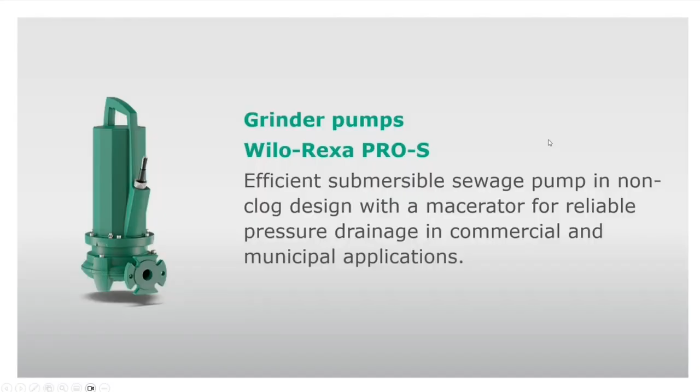First of all, the Rexa PRO-S are grinder pumps, so they are made for wastewater and especially for non-clog applications. So if you have fibers in your sewage or something like that, or heavy-duty applications, they come with a macerator to enable reliable pressure drainage, especially in commercial and also municipal applications.

If we come to the customer benefits of the Rexa PRO-S, they are excellent for anti-clogging reliability because of the new macerator they have. So it's a macerator with what we call a double shear effect. We have an outside grinder and an inside grinder at the same time in this product. We will also see pictures of that and a small video to show you how that works in particular with this double shear effect.

On the other side, we optimized the hydraulics and the macerator combination for higher delivery heads at best efficiency in the market. Additionally, the overall installation costs for that product are very low because we use on this product a 1.5-inch discharge, which is the smallest one possible. With that, we are also able to use the smallest possible piping here, so you can work with really small pipes to bring down the general installation costs of the project.

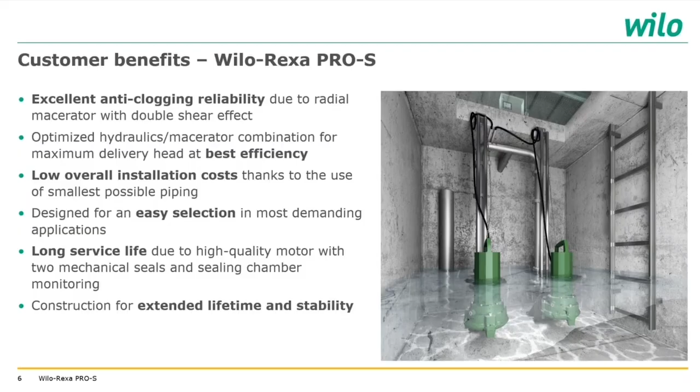If we have a look at the product in detail, first of all we wanted to highlight 6 explicit product features. As I already mentioned, the product comes with a radial macerator with a double shear effect to make it most reliable in all wastewater applications.

Secondly, it comes with a robust cast iron motor housing and FM approval as standard. All Rexa PRO-S units come with FM approval, making it the #1 choice for water management and commercial buildings. The third feature is nice to have: the Rexa PRO-S units are rated for non-immersed operation for 30 minutes.

That means you can lower the water level in the sump down to the level of the hydraulics, so you can emerge the motor even in a submersible installation, which helps minimize tank volume, gives maximum flexibility with sump size, lets you make sumps as small as possible, and provides a high switching volume.

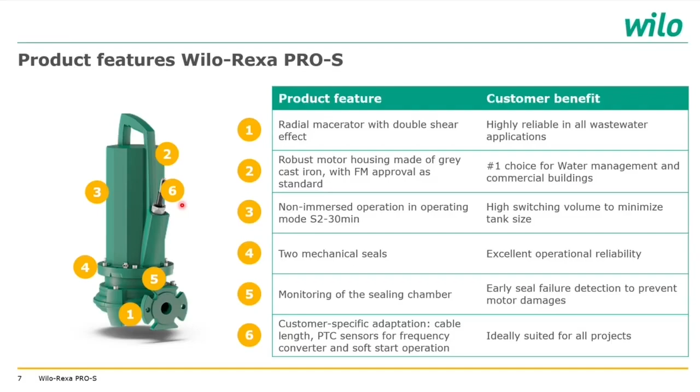If we have a look at the duty charts, we can see that we offer quite a big range of head here. We have 4 different duty curves available in the duty chart.

First, the Rexa PRO-S 0322 with 5.2 horsepower and a shutoff head of around 180 feet. Then the Rexa PRO-S 0312 with 3.4 horsepower and roughly 140 feet of shutoff head. The PRO-S 0311 with 2.3 horsepower and roughly 120 feet, and the S0302 with 1.5 horsepower and roughly 90 feet of shutoff head.

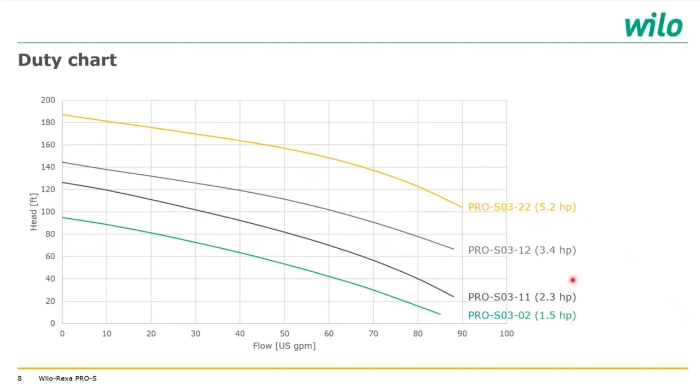If we compare that to what we offered so far, the Rexa CUT GI, we can see that we expanded the duty chart dramatically. The maximum shutoff head previously was around 140 feet, so we now get a much bigger range compared to what we had before with the Rexa CUT GI.

What's also remarkable is that we were able to downsize the motors because of the higher hydraulic efficiencies of this product compared to the GI. As you can see, the GI 0330 and 0332, which are now pretty equal to the S0302 duty curve, had to use a 2 horsepower motor, while the Rexa PRO-S only needs 1.5 horsepower to cover the same curve.

The same with the CUT GI 0343, which used a 3.4 horsepower motor, compared to the S0311 which covers pretty much the same duty curve with only 2.3 horsepower. So the 3.4 horsepower motor now delivers a lot more head than the previous option. And as I mentioned, this 5.2 horsepower curve comes totally in addition to what we had so far.

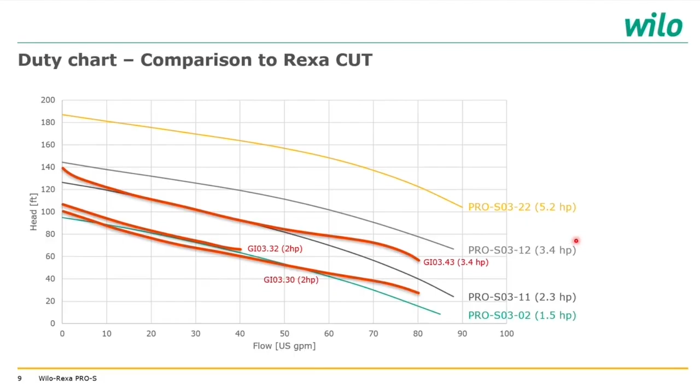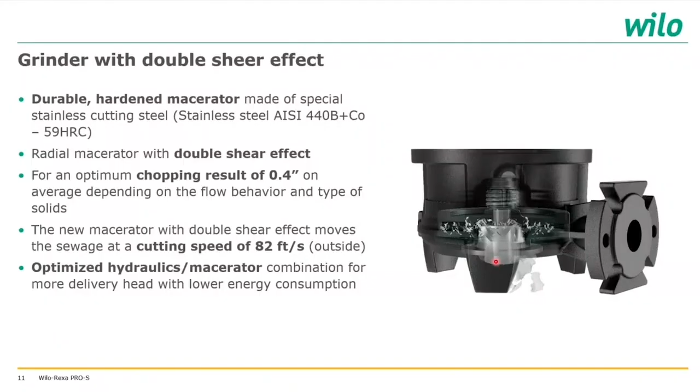This new macerator has a cutting speed of 82 feet per second on the outside, and all the hydraulics are optimized to deliver the maximum head with the lowest energy consumption.

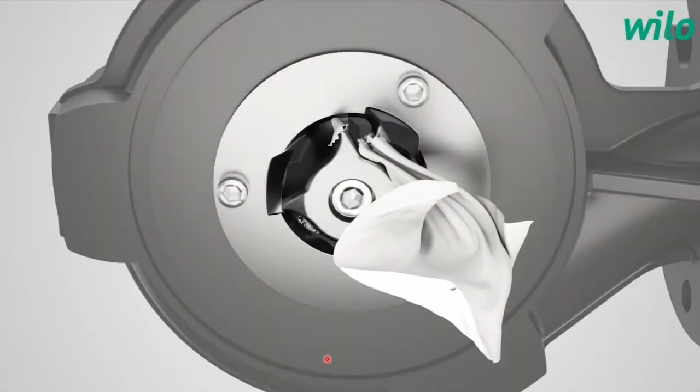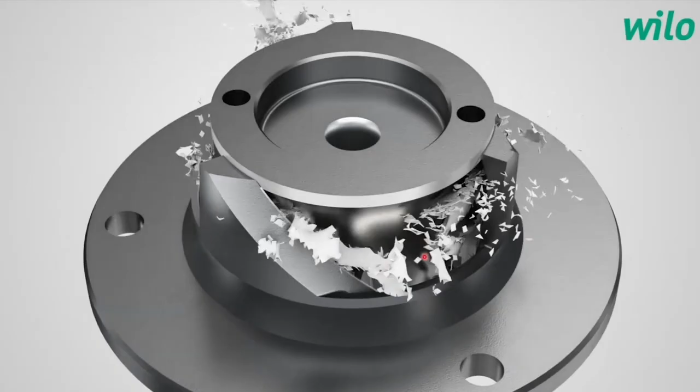Now we can have a look at a short video to see what this double shear effect is about that I was talking about. We'll see now how cloth is cut on the outside and on the inside of that macerator. First of all, you can see there is an outside blade which cuts the cloth into smaller portions first before it enters the hydraulic, and then we have an inside blade which cuts it into even smaller particles, and then from there it goes into the impeller, and from there into the hydraulic.

We can have a look at that again because it's quite short. So we have the external cut first, the outer cut, and then the internal cut, where it cuts again to make the particles even smaller before they enter the hydraulics.

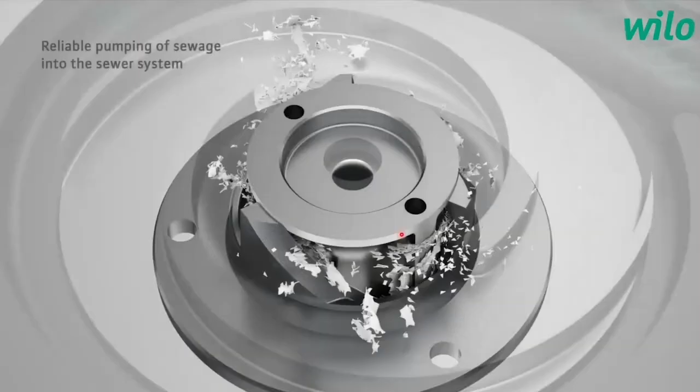Okay, now if we have a look at the technical data of the Rexa PRO-S, as I mentioned it always comes with a discharge port of 1.5 inch. It's a 125 pound ANSI flange. The weight is depending on the size of the pump, so depending if it's the 1.5 or the 5 horse motor, it's somewhere between 84 pounds and 113 pounds. The maximum delivery head, as I mentioned, is roughly 180 feet.

And we have different main supply options here. On the one hand, we have single phase options, available in 230 volts for the two lower curves with 1.5 horsepower and 2.3 horsepower. And we do have three-phase options in 230 volts and 460 volts on all of the curves - the 1.5, the 2.3, the 3.4, and the 5.2 horsepower curve.

Then we always use the gray cast iron motor housing option on the Rexa PRO-S. We'll see later on a comparison to the Rexa CUT - there we still had the stainless steel sheet metal motor housing. So this is one main differentiator here.

Then we have the continuous operation mode for immersed operations. So if it's underwater, it can work pretty much 24/7 if you'd like. If you want to emerge the motor housing, you're able to do that in operation for 30 minutes, which is usually sufficient to empty the tank, because we're just talking about from the top of the motor housing, so when it gets emerged to the bottom of the hydraulics.

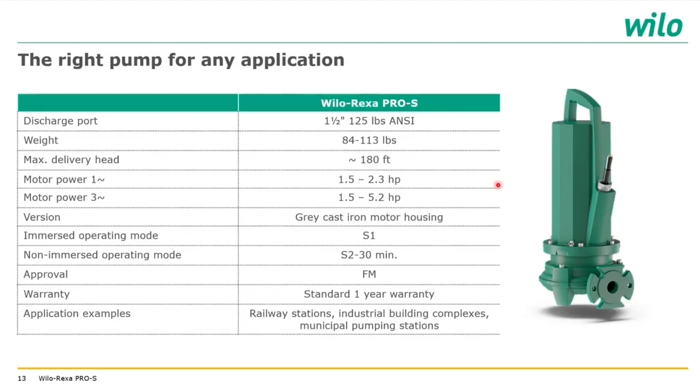If we compare it to our predecessor here, the Rexa CUT GI, I highlighted here the main differentiators. One we saw already, we get a way bigger duty chart than we had before, but there are also some other differentiators. The Rexa CUT GI was coming with a cCSAus approval for electrical safety.

Now this is one of the major changes I mentioned already. So with the CUT GI, we always had this stainless steel motor housing. This wasn't rated for hazardous applications.

Now the Rexa PRO-S comes with FM approval for hazardous applications. That's one of the main differentiators here, going from just the electrical safety certification to the hazardous area certification. Then, as we've seen on the duty curves as well, the power range expanded a lot. In the past, we had the 2 horsepower and 3.3 horsepower versions.

Now we have 1.5 horsepower up to 5.2 horsepower. What also changed is this emerged operation mode. With the Rexa CUT GI, you were able to emerge the pump for 15 minutes. Now with the Rexa PRO-S, you're able to emerge it for 30 minutes in operation.

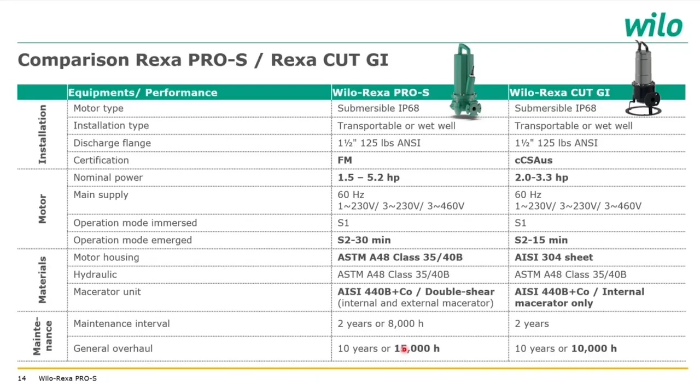Another differentiator is the maintenance. The maintenance interval for the regular visual inspection and so on is still 2 years, but the maintenance interval for the general overhaul increased from 10 years or 10,000 hours to 10 years or 15,000 hours. So the Pro-S is a more sturdy version, giving you a longer interval until the general overhaul.

If we compare it to the competition, what I've already mentioned on the first slide, we offer a pretty small discharge port here with 1.5 inch, to be able to work with the smallest possible pipings. You can always extend that to bigger piping, but you can also work with 1.5 inch pipes here compared to what the competition does with 2.5 or 3 inch discharges.

The delivery head is pretty much equal to what we see with all the major competitors. We offer around 180 feet, while the competition has 170 to 185 feet in that area, except Liberty, which offers like 250 feet, but with way bigger motors, up to 15 horsepower.

And there you can also see the big benefit of that high efficiency we have here. While others partly use vortex impellers, here we use a 2-channel impeller with the Rexa Pro-S, which brings the efficiency up a lot. So we're able to cover partly even higher delivery heads with way less power. If you compare it, for example, Myers with 170 feet of delivery head would need a 7.5 horsepower for that, while we do that with 5.2 horsepower.

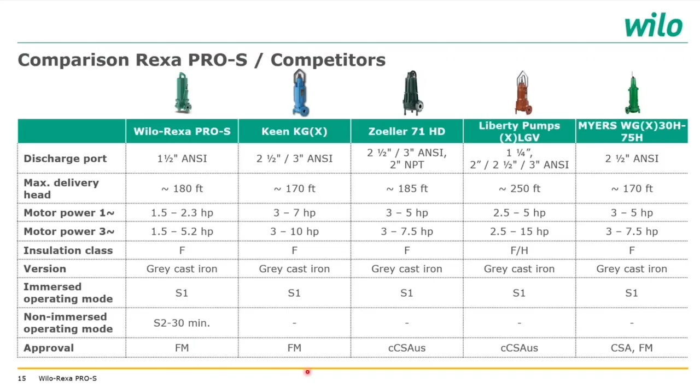Also, one reason why we changed the gray cast iron motor housing is because that's the standard in the US. All of the major competitors have that gray cast iron motor housing, and now we're equal there. The immersed operation mode is pretty much the same for everybody, that's the continuous duty. But what sets us apart is this non-immersed operating mode, where we offer 30 minutes. This is tested and certified that we're able to have this product run emerged for 30 minutes without overheating the motor or anything like that. And on the approval side, we now have the FM approval with the Rexa Pro-S, which is also pretty much the market standard for hazardous locations.

If we have a look at the stock articles we have, just as information, we will have all the different curves available on stock as of March 2026 in Cedarburg, with the lower 2 curves, the S0302 and S0311, as single-phase 230-volt options, 3-phase 230-volt options, and 3-phase 460-volt options. And the upper 2 curves, the S0312 and S0322, as 3-phase 230-volt and 3-phase 460-volt options. So the only differentiator between the article numbers here is really the voltage. There's no other changes between those 2 numbers.

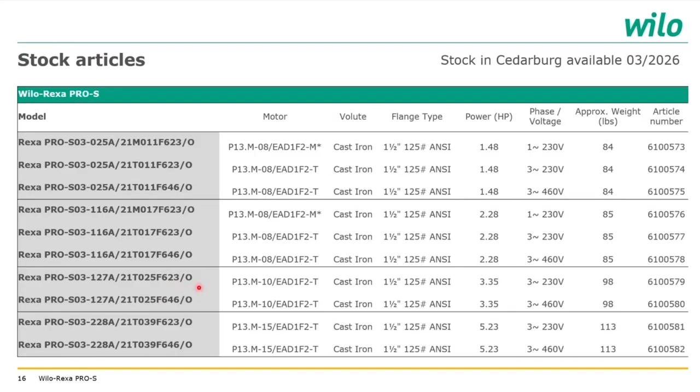If we look at the installation types, the Rexa Pro-S is available either as a wet installation or a transportable installation. The wet installation always goes with the suspension device EHV DN40/50/2RK, and the transportable installation goes with the pump foot from the Rexa CUT already. So this is the same article number with the pump foot.

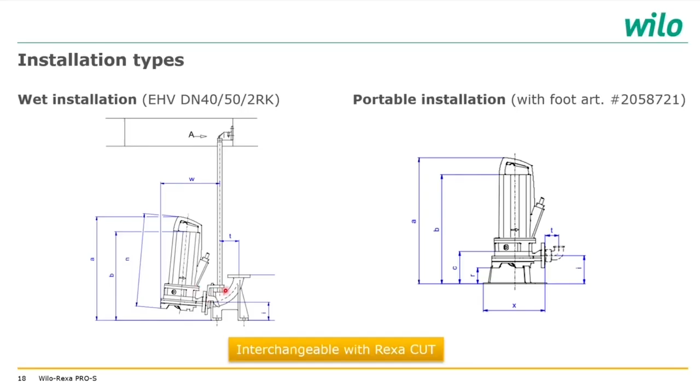With that, it's interchangeable with the Rexa CUT. If you have an installation already with the Rexa CUT on a suspension device, it comes with exactly the same connection, so you can easily replace a Rexa CUT with a Rexa Pro-S.

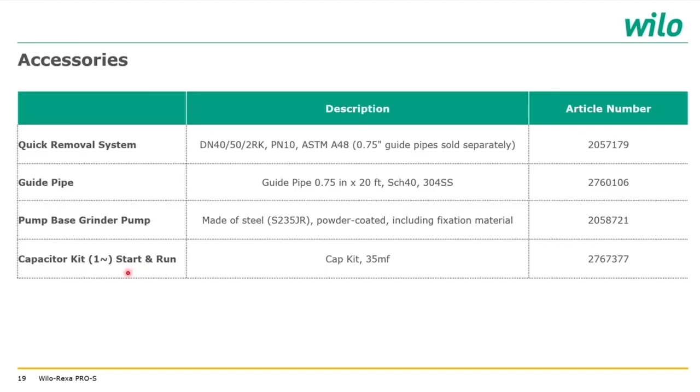Talking about accessories, we offer the quick removal system, which is the suspension device EHV DN40/50/2RK. Then the guide pipes, which are sold separately - we offer a 3/4 inch guide pipe. Then the pump base, which is the pump foot I just mentioned. And for single phase operation you will always need a capacitor, available as a capacitor kit, which we have in our accessories portfolio as well.

Next, I wanted to talk about the type key and the standard we defined for this product. Going through the type key, we always have PRO-S, which defines that it's a grinder pump. Then we have 03, which defines the nominal discharge diameter of 1.5 inch. Then we have a specific hydraulic key for each of the curves, as I mentioned earlier, with 02, 11, 12, and 22.

We have a characteristic curve number, which doesn't really apply for 60 hertz, but in 50 hertz we have for the same hydraulics partly different curves, so we have this curve number here. Then we have the material execution - A is the only available material execution, the standard cast iron execution. And we have a dash, which separates the hydraulic portion of the type key from the motor.

Looking at the motor specifically, we have a number 2, which defines the number of poles. We have, for example, a number 1, which is the efficiency class - so we have IE1, but there are also IE3 options. We have the T in this case for the mains connection, so M would be single phase, T would be 3-phase. We have a 3-digit number, which defines the motor power in kilowatts. We have F for the FM rating, 6 for 60 hertz, and 23 or 46 for either 230 volts or 460 volts.

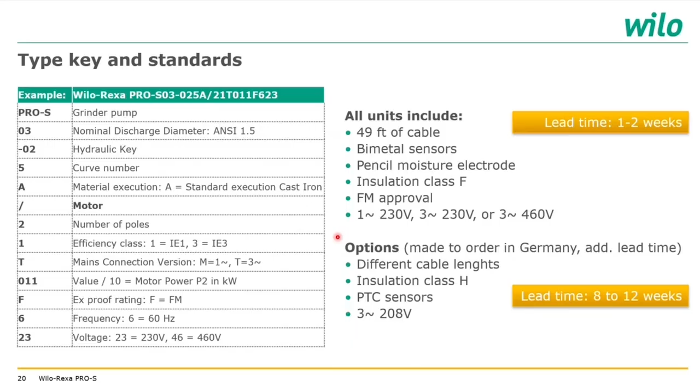Talking about customized versions - they are always made to order in Germany, which adds lead time, since they will be shipped from Germany. There you can have different cable lengths, also insulation class H if necessary, or if you want to run them on a VFD you can have PTC sensors, and there's also an option for 3-phase 208 volts. For those custom made options shipped from Germany, we're talking about a lead time of about 8 to 12 weeks.

As a last point, I wanted to inform you about what documentation is available. As of yesterday, the PRO-S is available in IntelliQuip, so you can make your selections there for those products. The online catalog documentation will be available as of January, mid-January I believe was the date I got. They are already included in the newest water management price book, which was sent out last week if I'm not wrong. We also have a product brochure available, which will be in the online catalog, but you'll get that right away - we can answer that in the follow-up email.

Okay, perfect. Right, that looks like that was probably our last question here.